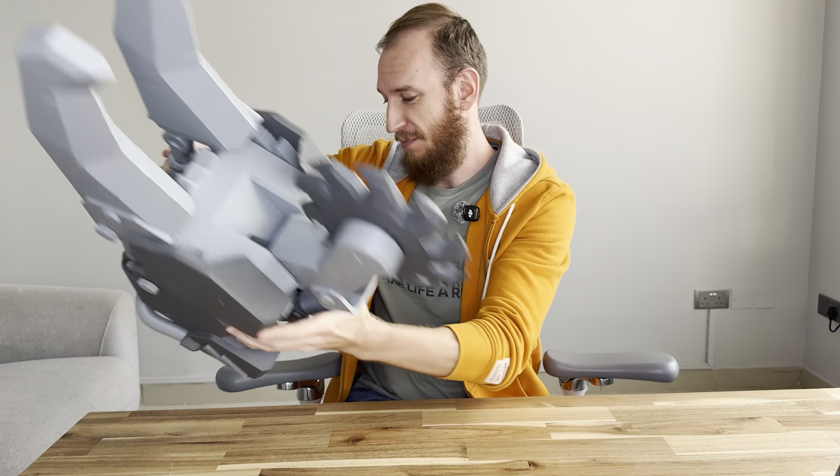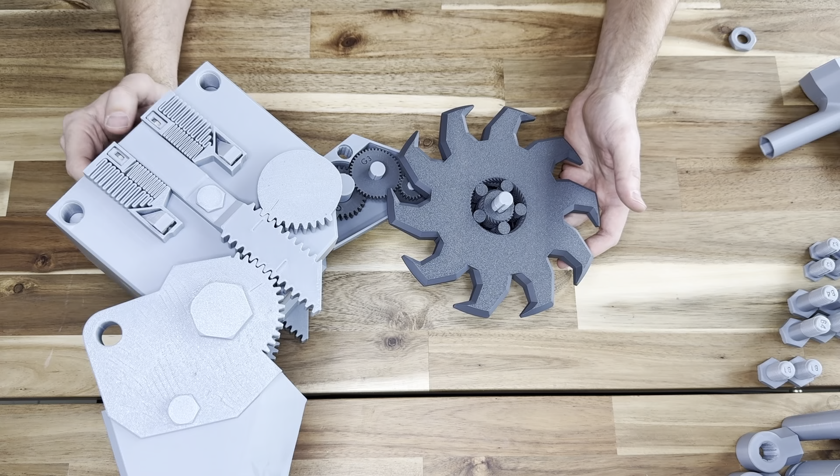After making my Doom shield, where I used a bunch of ratchets and springs and also a herringbone gear bearing, I decided to make something with my claw, and here I also use a herringbone gear bearing, but now it's printed in place.

Why do I use this technique here? Because when you print in place, you need to make some clearance between gears, and this causes some play. If you do this in a big part like a shield, where there's a big wheel, this play will be too big, and it will collide with the outer and inner shield. Here, though, it's not quite as big, so it's not colliding. It's colliding a little bit here, so that's why there's some rounded geometry.

So it's just gliding here. And the main thing is the gears.

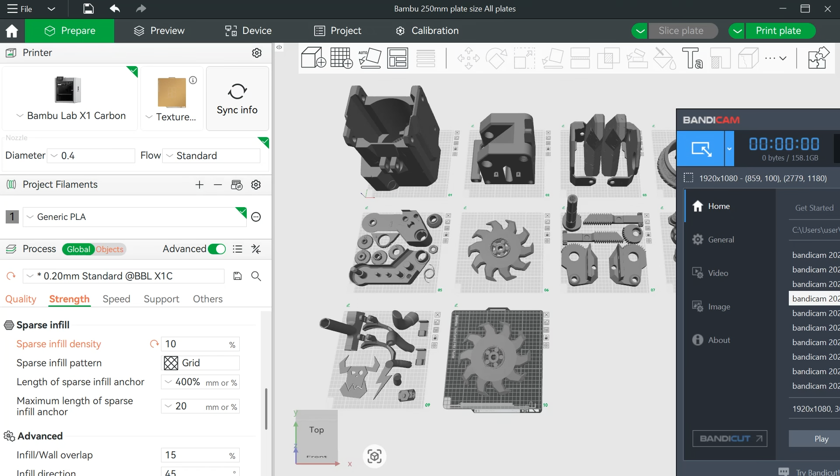Let's move on. Now let's talk about printing settings. For most parts, 2 walls and 10% infill is totally enough. It's a good compromise between durability and lightweight.

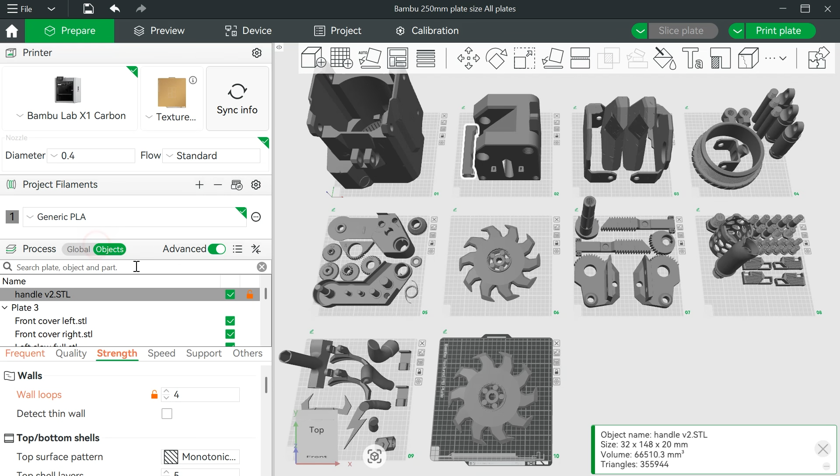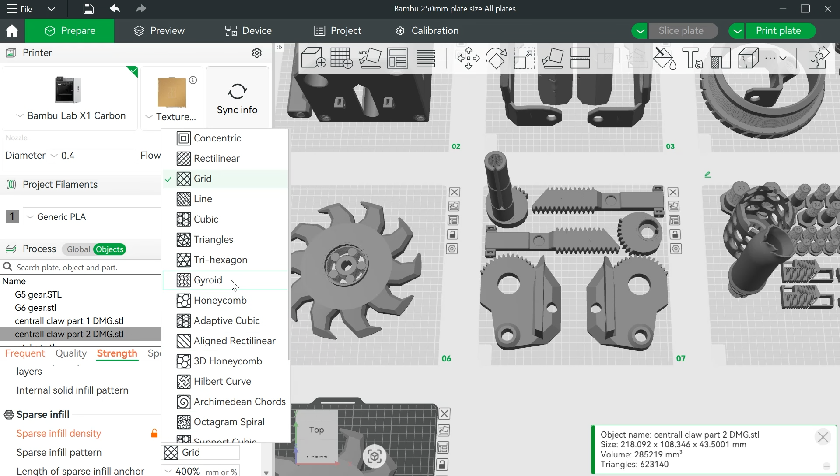But some parts need reinforcement, for example this handle - better to print with 4 walls and 30% infill. The same for each piston, also 4 walls, 30% infill, and the center claw, both parts, 4 walls and 30% infill. For infill, I recommend grid or gyroid, but don't use rectilinear because it's not durable and not reliable. Also, all bolts must be printed with a minimum of 4 walls and 40% infill, because they are highly loaded.

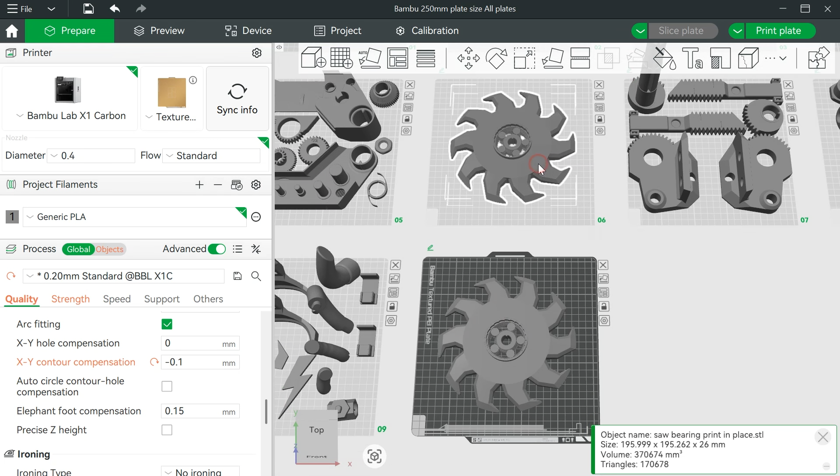Also, for the printed planetary gearbox, I have 2 options. One is standard and one with a bigger clearance between gears. It's good for scaling down, or if you have some problem with flow ratio or maybe precision, it can also work well for you.

Also, if you want to scale down, for example to 80%, you have to set up this parameter, XY contour compensation, with the value minus 0.1 millimeters. It provides more clearance between parts, and it will be easy to assemble, because when I designed it, I designed some clearance between parts, but when you scale it, the clearance also scales. And if you don't set up this parameter, it will be hard to assemble, hard to put some parts in place, and bolts will be screwed very tight. So it's definitely needed.

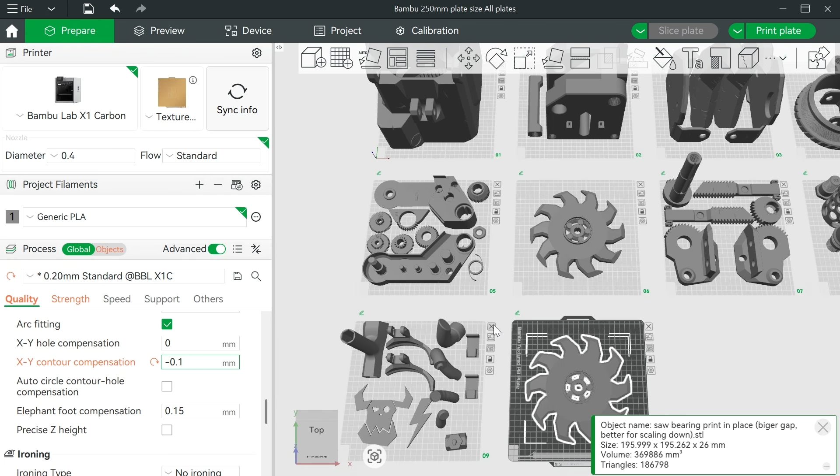And if at 100% it's also going very tight, you can also use this parameter. It works very well. You can read about this parameter on this website. It works like every surface is offset from the original surface. So the inner contour will be bigger and the outer contour will be smaller.

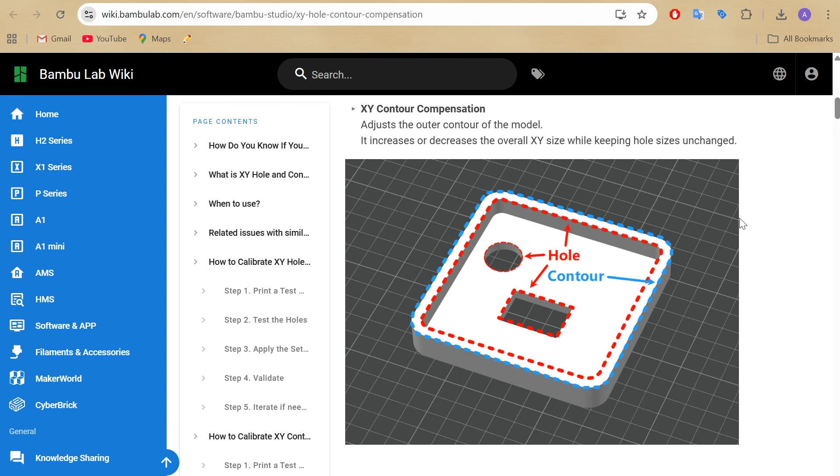And also, to print this project, you need around 3.2 kg and 4 days of printing. So basically it's around 1 week of printing, but that's for 100%. For 80%, I think it will be around 2 kg or less.

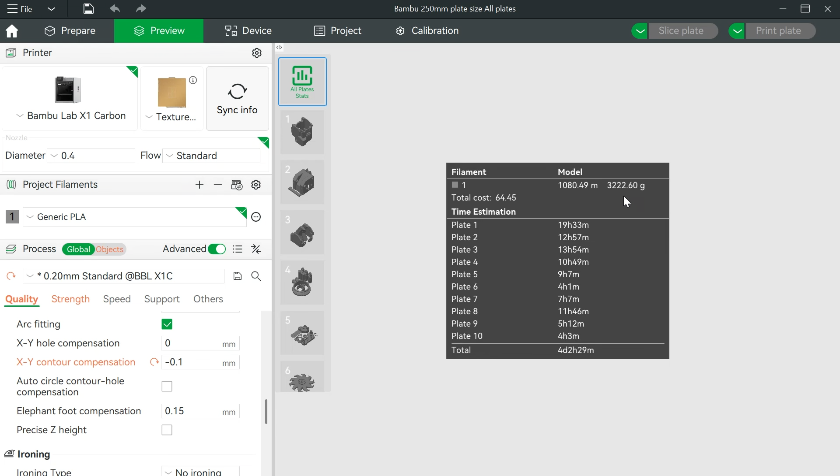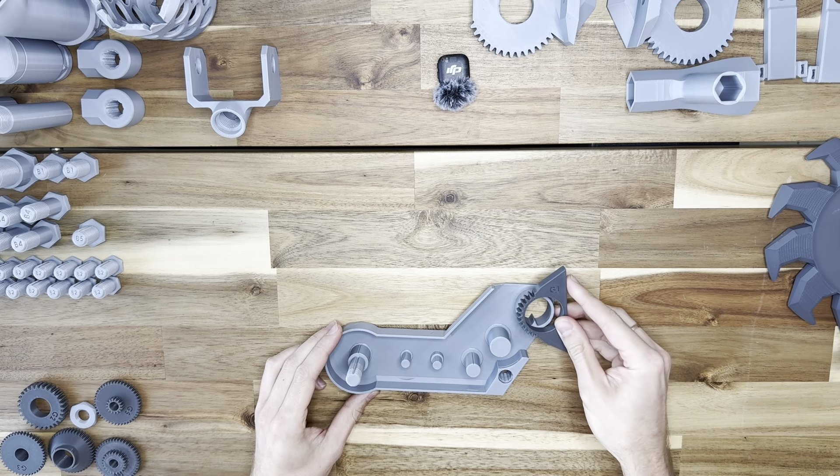Okay, let's start with the central claw. First, we install gear G1 on this shaft. Next, gear G6: we need to first install the ratchet on it. You need to orient it clockwise, and you can check it by putting it inside. In this direction it works, and if you flip it, it will not work. So this direction is correct. So insert it here.

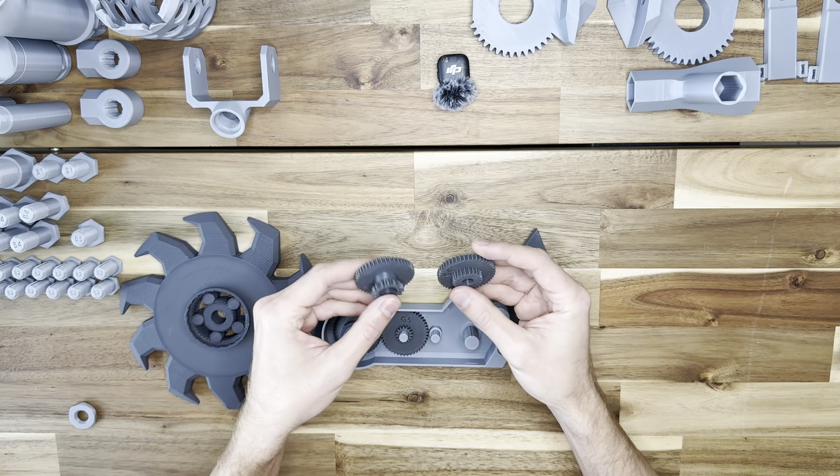Next, insert gear G2. Next, G5. And gears G3 and G4 you need to insert together because they have strange geometry to print without supports. Like this. So it's G1, G2, G3, G4, G5, G6. And after this, you need to insert the bearing. Make sure it's inserted to full depth.

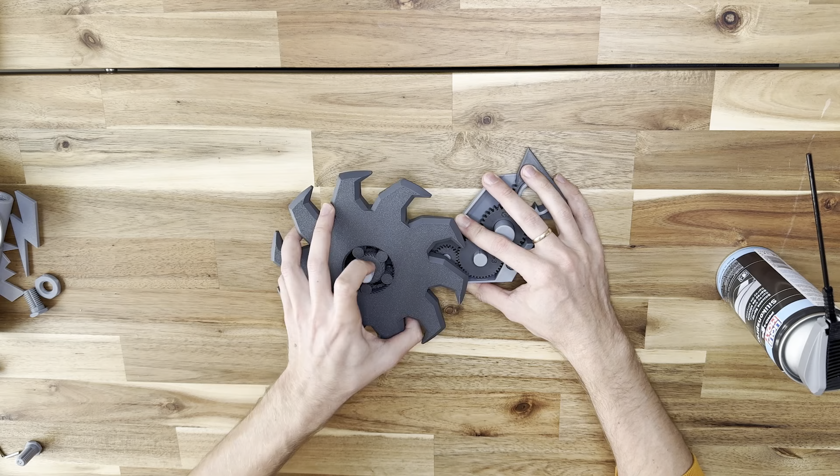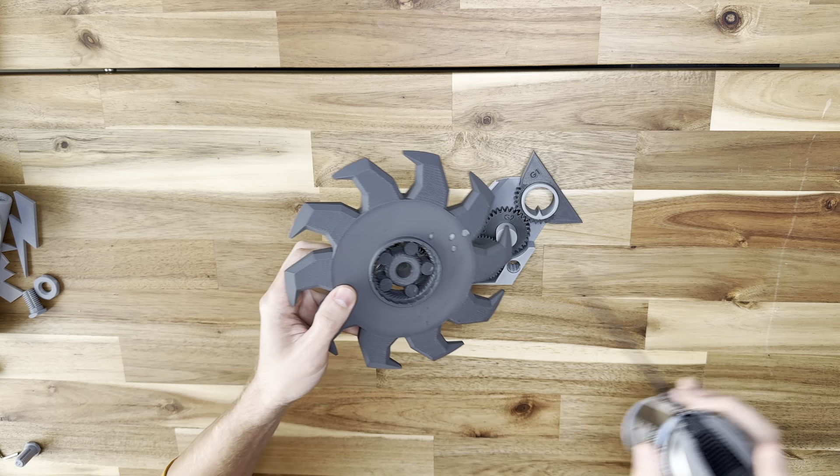Also, you need to apply some silicone spray lube on all gears and shafts to decrease friction, and also on the bearing. And after this, the final part, the second part of the claw. And finally screw the nut.

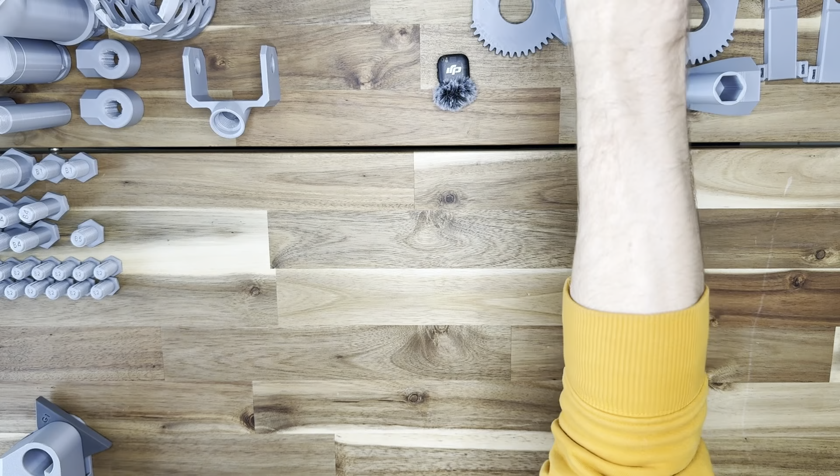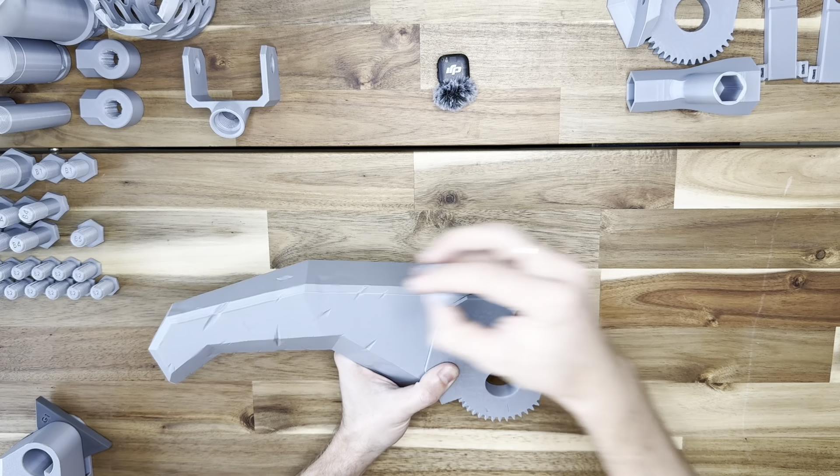Okay, next step, we need to assemble a big claw. So take the claw gear, take bolt B2, insert it and screw it. You can use a hex wrench. Here also B2 bolts. If it goes too tight, you can rotate it back and forth. Making this movement, it will be easier to screw it inside. Repeat the same with the second claw.

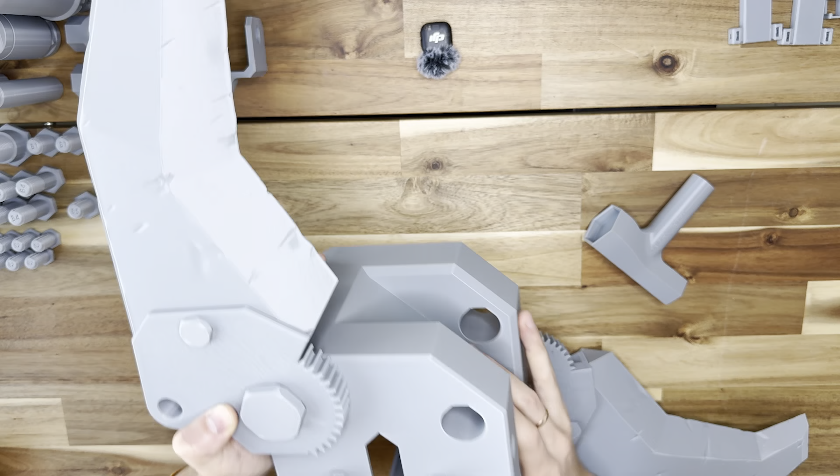Now we need the front body and big claws, and also bolt B3. Don't tighten too much because it must rotate freely. And again, if it's going too tight, you can try to rotate it back and forth, or you can print with XY contour compensation minus 0.1 millimeters. It definitely can help with it. And also, if you want to scale down this model, contour compensation minus 0.1 millimeters will help to assemble the smaller model as well.

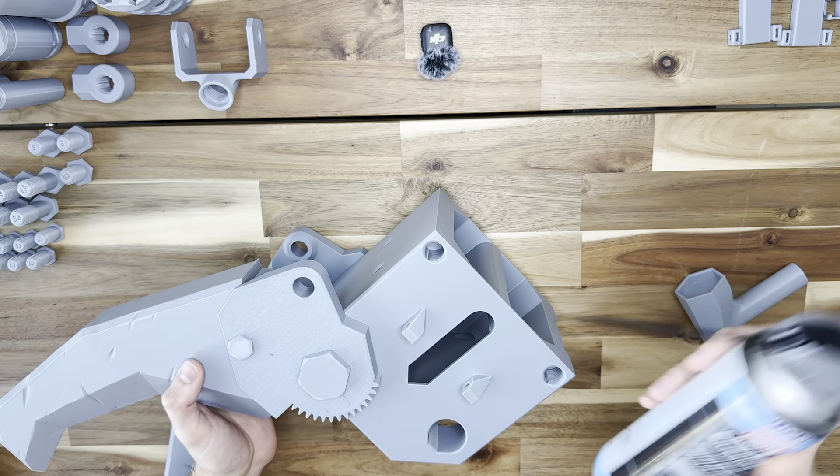Okay, check that it rotates. Also, if it rotates hard, you can use silicone spray lubricant. So just apply it here, or before you screw the bolt, you can apply it on the bolt.

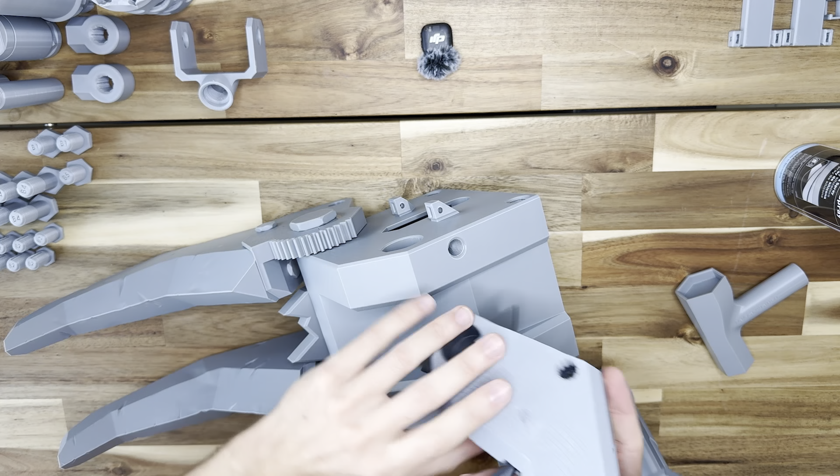Okay, next we need the central gear shaft. Insert the central claw inside and insert the shaft inside. Oh, wrong way. From this side. Okay. Insert it here. It has only one position you can insert it. Okay, secure it with bolt B5. Okay.

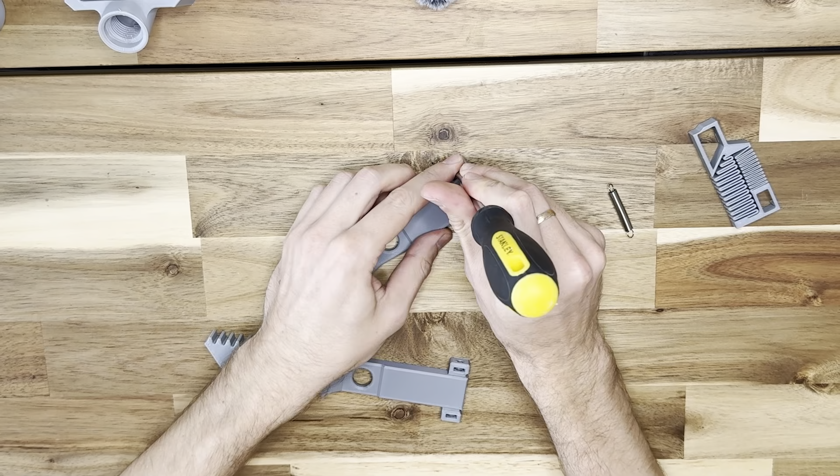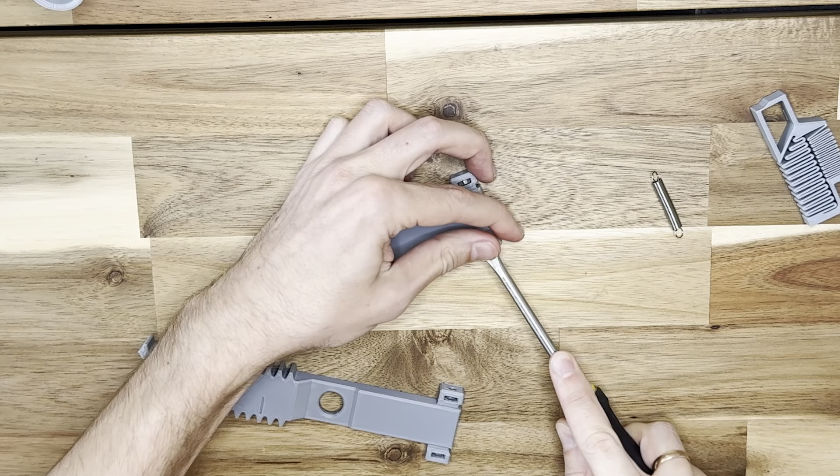Now, if you want to use a metal spring instead of the printed plastic spring, you have to insert nuts inside the nut slots here. You can use additional tools like a screwdriver to push it inside. Sometimes it's not easy. So you can help with an additional tool like pliers to correct the position and direction of the nut.

Oh, my English is so good.

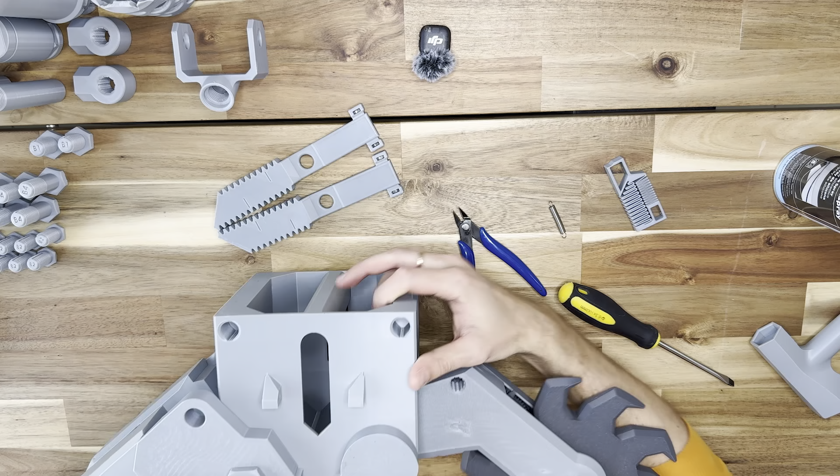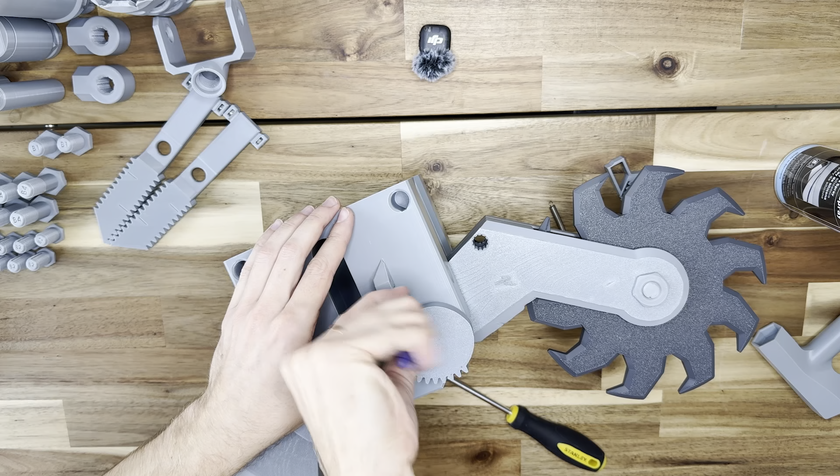Sometimes it's just rotated in the slot, that's why it's going hard. Okay, done. And the same you need to do with the front body. Insert the nuts as well. Sometimes you just need to correct the nut. Also, you can use pliers for this, because two edges can move it more directly, more straight.

Okay, done. For the printed spring, it's much easier. And actually, in the new version, I added an additional spring on the other side, and it works much better and provides very good tension. Why do I use a metal spring? A metal spring keeps tension for a long time, so it's more reliable. And when I sell physical copies, I assume that the client can't print by himself, so the metal spring can survive for much more time.

So now we can attach the metal spring to the front body, because it will be easier to assemble after if we first attach the spring to the front body. And the same on the other side.

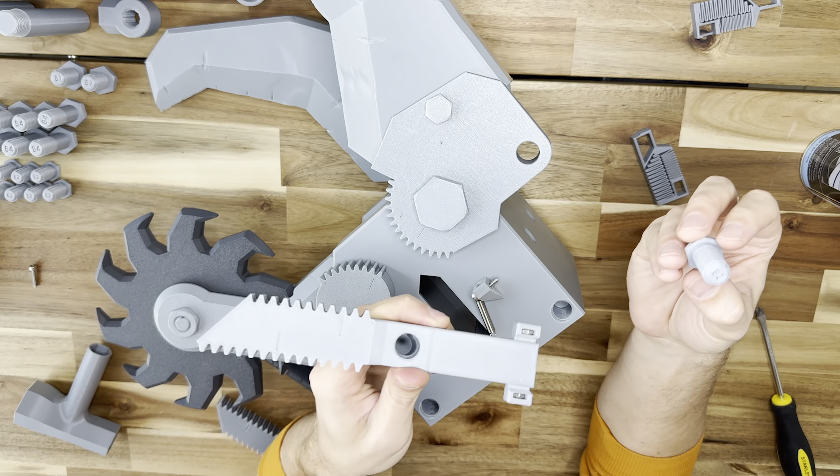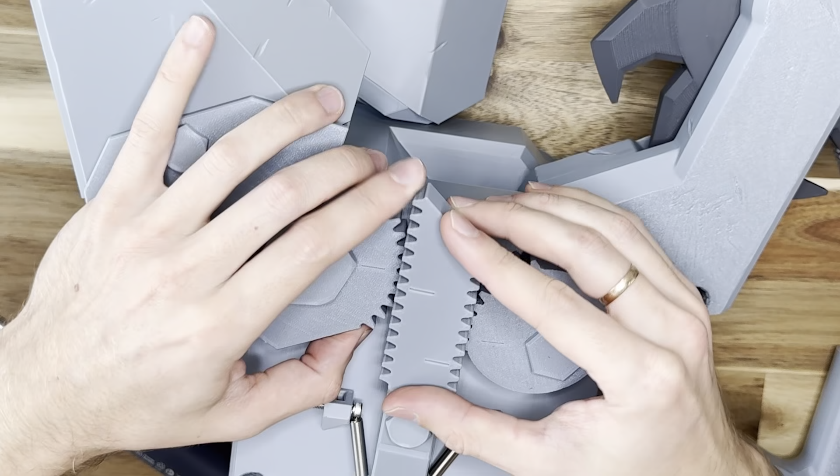So now we need to attach the handle to the geared rail. We take bolt B2 and screw it. Only on one side. Like this. So this geometry in the front and this geometry, this angle to the bigger claw inside it, and we need to align these marks on the gear. Actually, you can move it to make the bigger claw a little bit asymmetric. So more natural, more orcish style.

Okay, now the second rail, also align here. The bottom gear must be aligned the same, like in front, the right position and left position must be the same. But the big claw can be different, like this one. It's okay. Okay, now screw the second rail. Okay, it must move easily.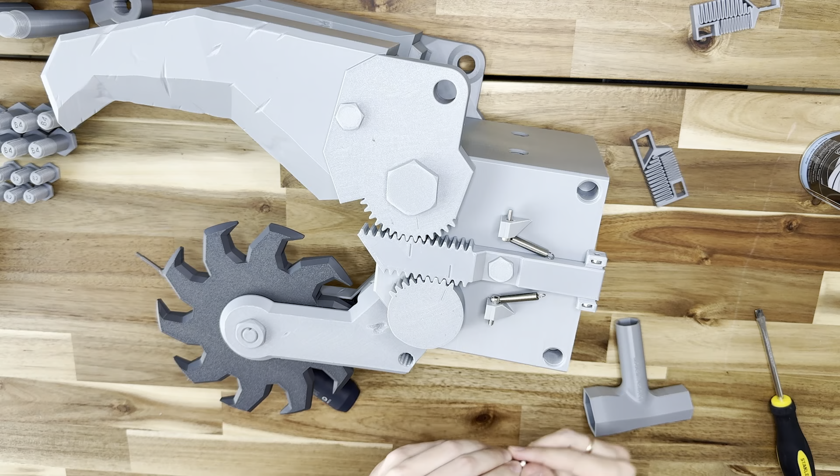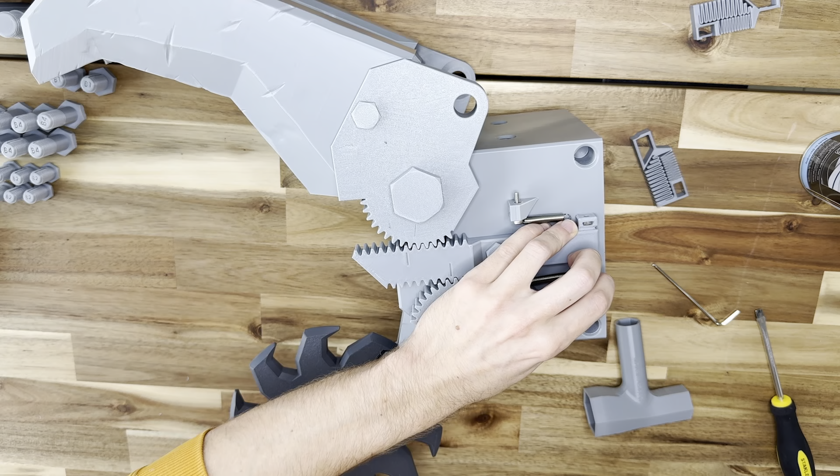And now we can attach the metal spring. We can open it a little bit to help it. Okay, now we can test it. And it works. It's very loud. And for the printed spring, it's a little bit easier. So again, first we need to attach the handle.

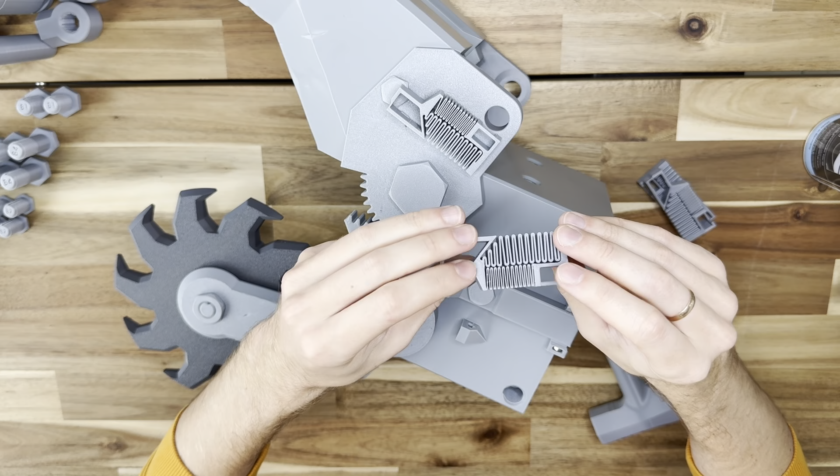And now we need to insert the spring. It has a left and right spring, so you need to check it before. It has a little gap with this surface and this surface, so you need to check it first. So the gap must be aligned to this surface. Also, here is the locking geometry. Its locking geometry must be near this surface. So just press on it and it's locked here. Again, lock geometry. And the same on the other side. That's it. That's so easy and faster.

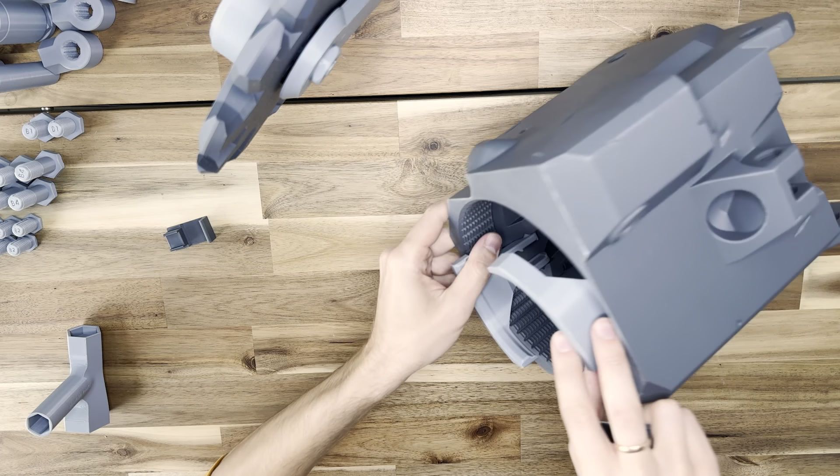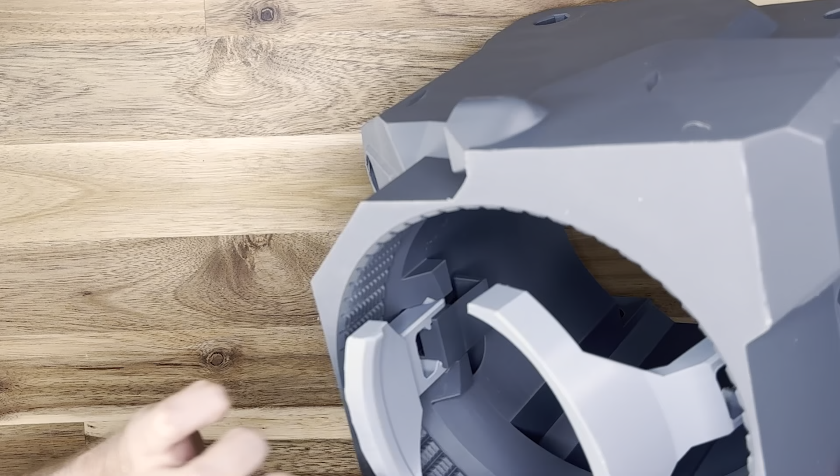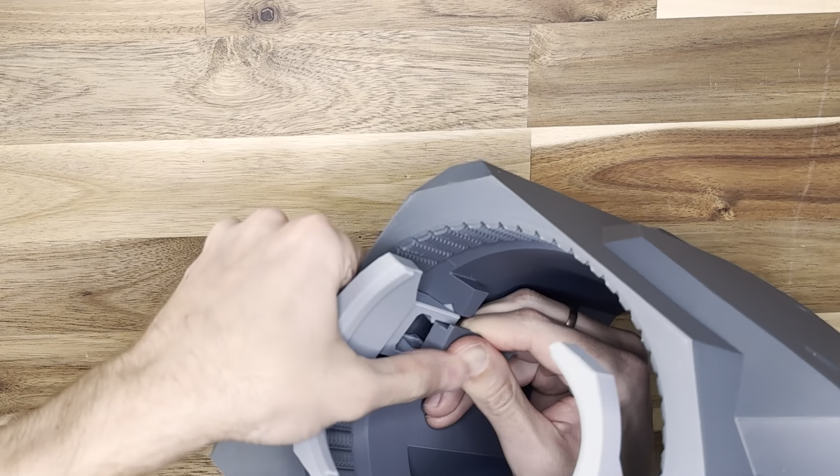Okay, now we need to insert hand holders in the main body. Just push it in the slots. And now we need to secure it with these fixators. Also, now it has an additional spring that prevents it from folding. So before, it was folding by gravity, but now it will hold it. Just insert it and push on it. And now like this. After this, insert the mega nut.

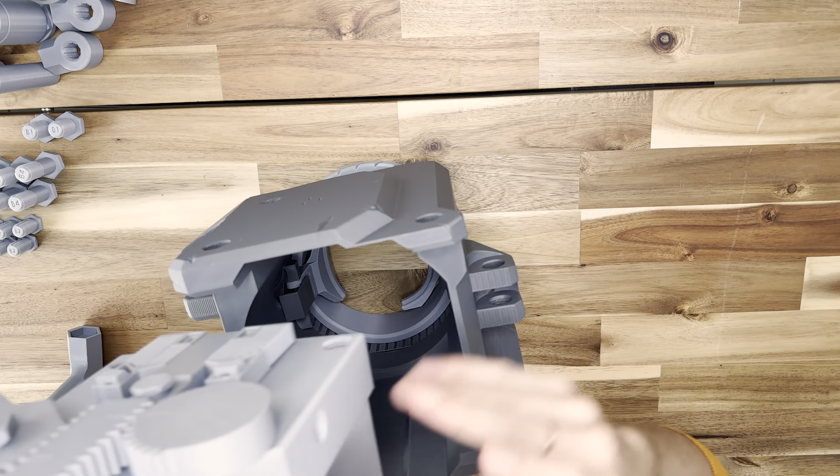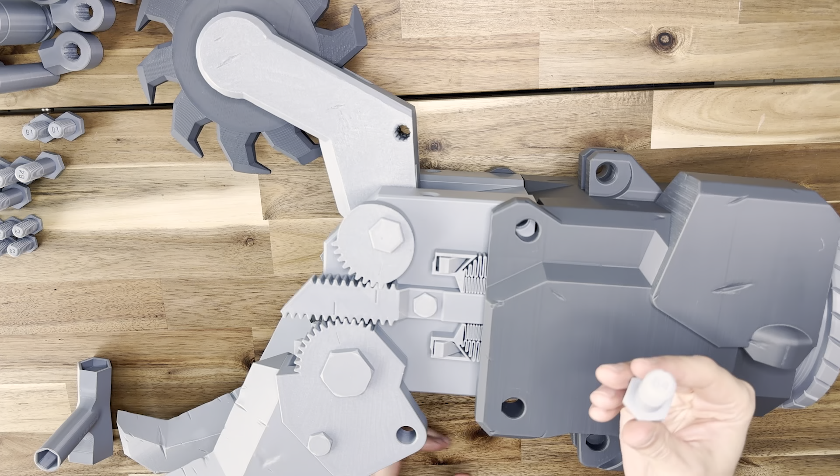Next, attach the front body to the main body, like this. So one bracket opposite the center claw. B4 on the upper side, opposite the big claw, and B1 on the downside. And repeat the same on the other side.

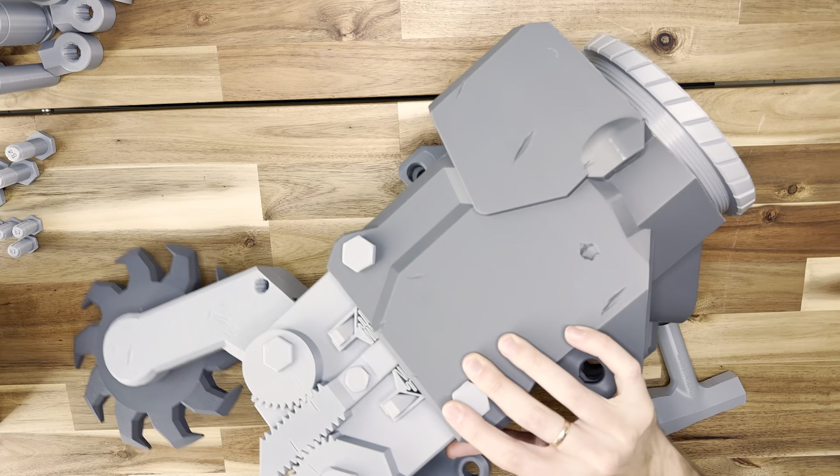Now place the decorative cover on the front body and secure it with a B2 screw. It's the same on the other side. Okay.

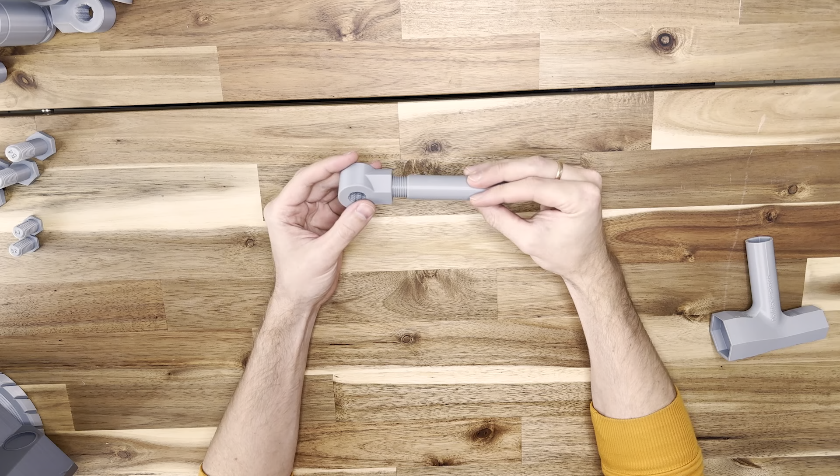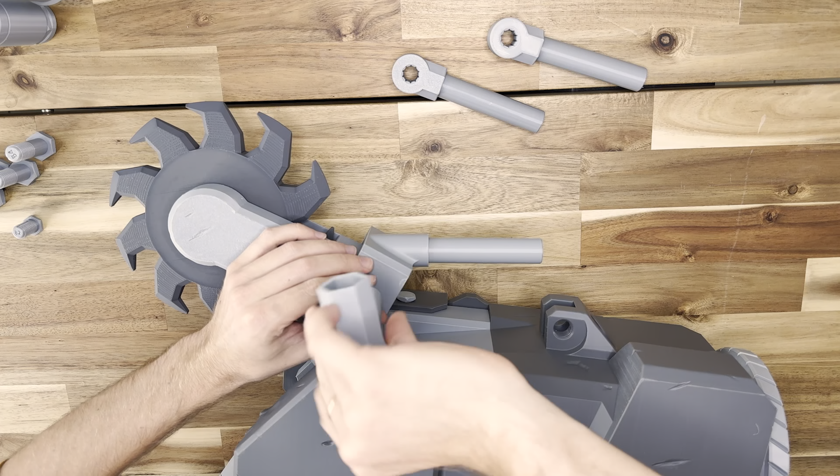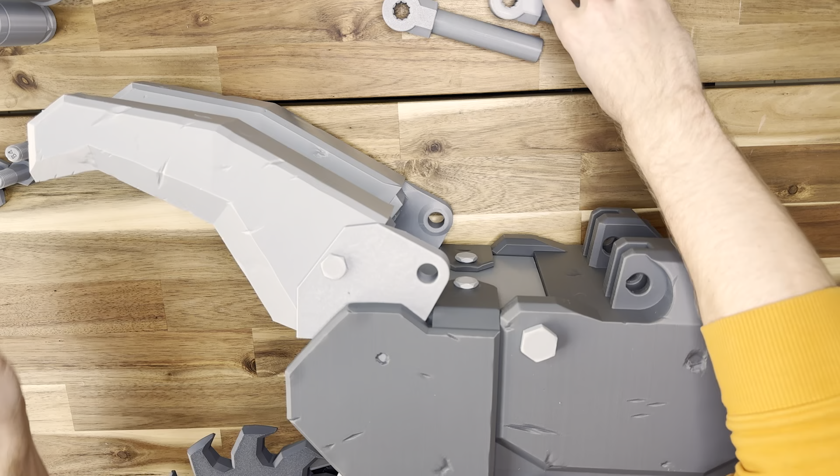Now we need to attach the piston to the bracket holder. Just screw it inside. And attach it to the claw. Use B2 bolts for it. Also, don't screw all the way. It must rotate. And on the opposite side, the same. Here we need to use B4 bolts. Also, it must rotate.

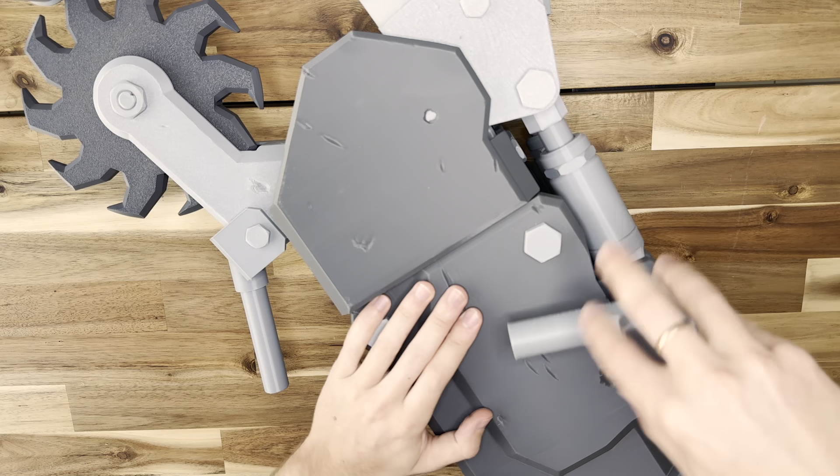Now insert the cylinder in the piston and insert it into the main body. Also we use B4 bolts here. Okay, almost done. Now the exhaust pipe. So it just screws in like this and screws into the main body. Okay. Now pipes.

I make them separately for easy painting and printing without supports, because I like printing without supports. I will show you just how to assemble it, but without glue. So insert the first hose here. Here is flat geometry, and also here's flat geometry. So it's inserted like this. After, here's also a different connection geometry. So this one goes here, this one goes here, and this one goes here. Okay, like this. And on the bottom.